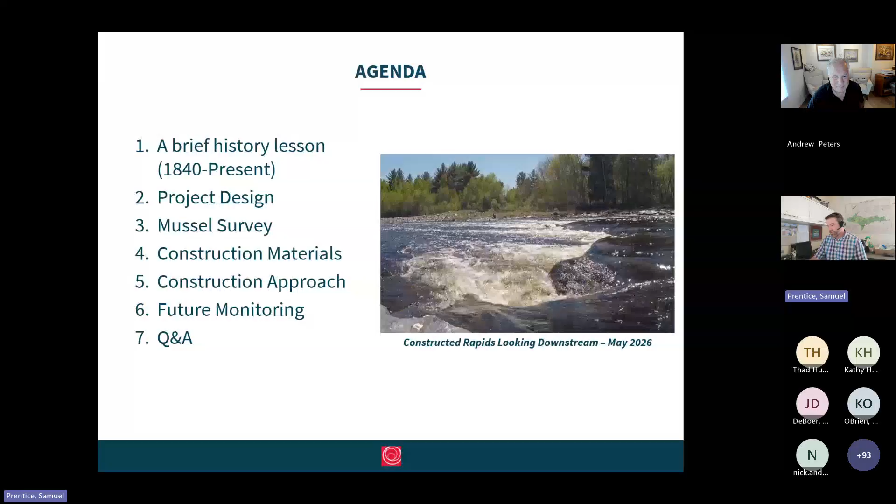So for folks that are not familiar with the state of Michigan and Michigan's Upper Peninsula, we're almost into Canada. We're on that south shore of Lake Superior, and this is just an older geologic map of the entire country.

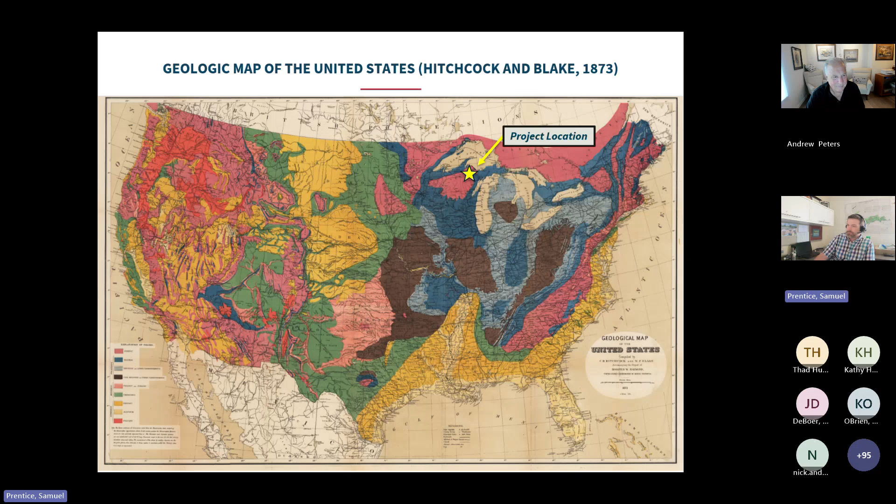Into Michigan's Upper Peninsula, the copper rush happened in the mid-1800s, 1840s. If you guys are familiar with the California gold rush, the copper rush itself was like ten times the amount of money made from that shorter gold rush in California.

And then this project, the Republic project, that was actually extraction of iron ore from the earth. So you have a lot of minerals that were pulled out of Michigan's Upper Peninsula, certainly into Wisconsin and the Minnesota Iron Range as well. But it's just a really cool part of this project, and it does actually have ties to the work we were doing more recently.

So you'll see the little note there called Republic District. That is the Republic Dam and the project site we'll be talking about today. There was a mine opened in that area in 1872, and then one of the dams we just removed in 2024 was actually original to that mine, built in 1876.

This is a little ortho mosaic just from Google Earth. So the original mine operated from 1872 through 1920. There was a pretty long hiatus here and at many of the other iron mines in the Upper Peninsula. The pelletization for making taconite, these marble-sized pieces of ore, was developed in the early to mid-1900s, and that was the reason for the reopening from the 1950s through 1982. The mine closed for good in 1982 and has not reopened.

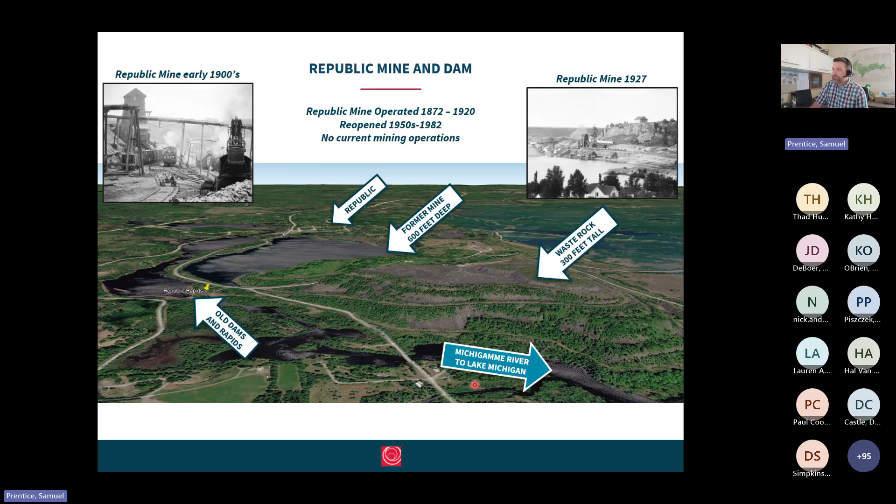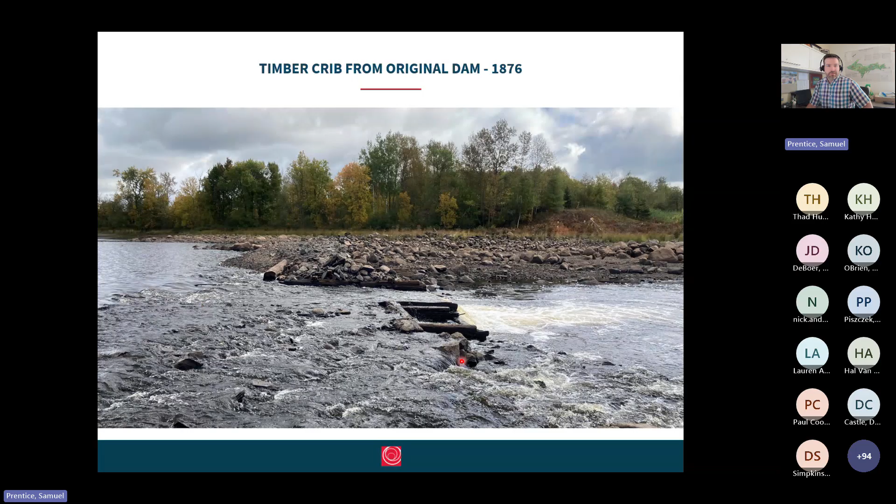So this is that timber crib I was talking about from 1876. That old open pit mine is behind the trees here. There's a former powerhouse intake canal we'll talk about later. But yeah, this was the original timber crib structure, built in 1876 and removed in 2024.

Some more recent history, 2010 to present: like I mentioned, Republic is trying to reinvest in the outdoor tourism industry, with a pretty low likelihood of the mine reopening.

GEI did a couple of different dam inspections. From those inspections, there were multiple repairs recommended on the dam itself. From that point, really into 2021, there was improper operation of those gates. They were raising and lowering the water very quickly, and that had impacts to the riparian wetlands, obviously to fish, mussels, and other organisms that could be stranded. So there was a lot of concern for the environmental health around the basin and for the river. That's really when we started to get involved.

We were trying to think of ideas for how to maintain some water level but also allow for fish passage. That was when I got involved, in 2018. And like Kathy said in my bio, for this project I did grant writing, data collection, design, construction oversight—kind of everything from beginning to end.

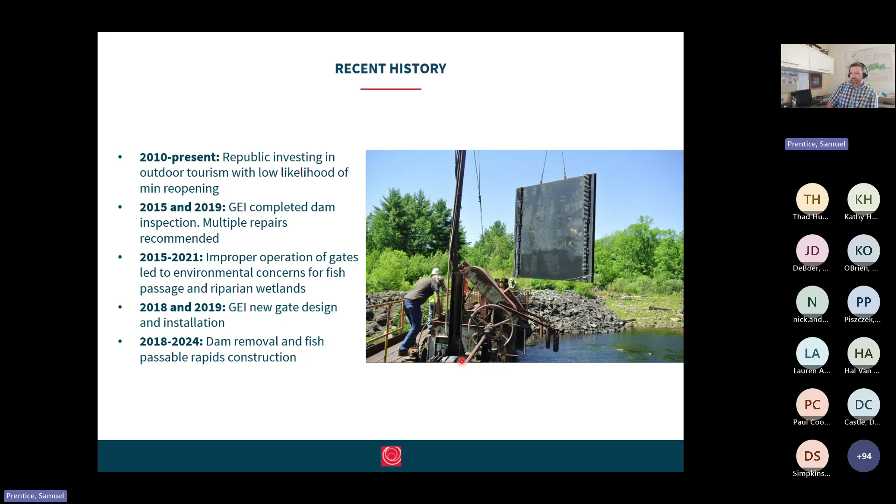Now that we're through the history, I want to talk a little bit about the design approach on the project. The goals we were given, working with the client, were to remove those two dams, build a passive structure that would maintain a water level they wanted within the river basin, and even support some of the infrastructure upstream.

There's a highway bridge crossing pretty far upstream where a lot of boats were bottoming out with the gates open on the old dam and lower water levels. So it wasn't really just to drive the economy; there were also some infrastructure concerns with having those lower water levels in the summer.

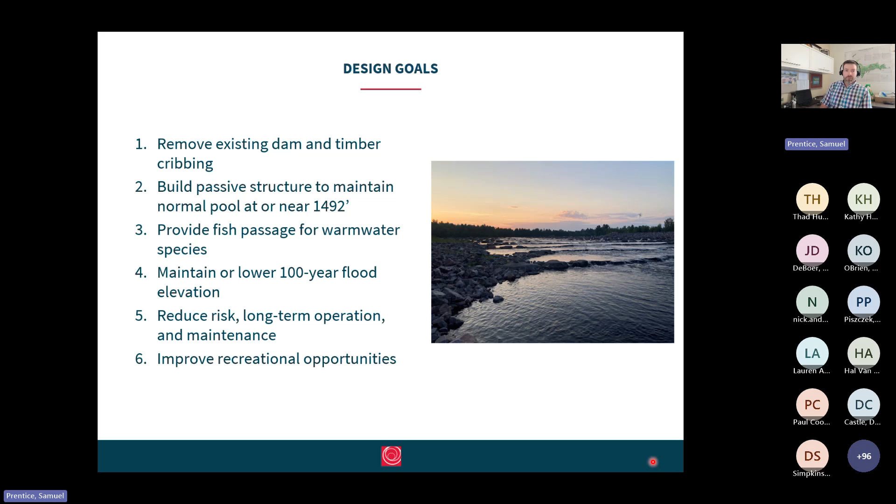Providing fish passage for warm water species, and I'll talk later about the differences between the swimming capabilities of warm and cold water species. Also, maintain or lower that 100-year flood elevation, reduce long-term risk and maintenance, and again, improve those recreational opportunities.

So the design we landed on was a rock rapids. We probably went through four or five different options over a couple of different years on what to build here. For those not familiar, a rock rapids is an alternative to full dam removal.

These boulder weirs are set up so that we're only dropping about 0.5 to 0.6 feet across each weir, stepping down this 15-foot head differential.

Another really important design aspect is these resting pools. Below each set of boulder weirs, we have at least one, and sometimes three, resting pools for fish to recover and then continue moving upstream.

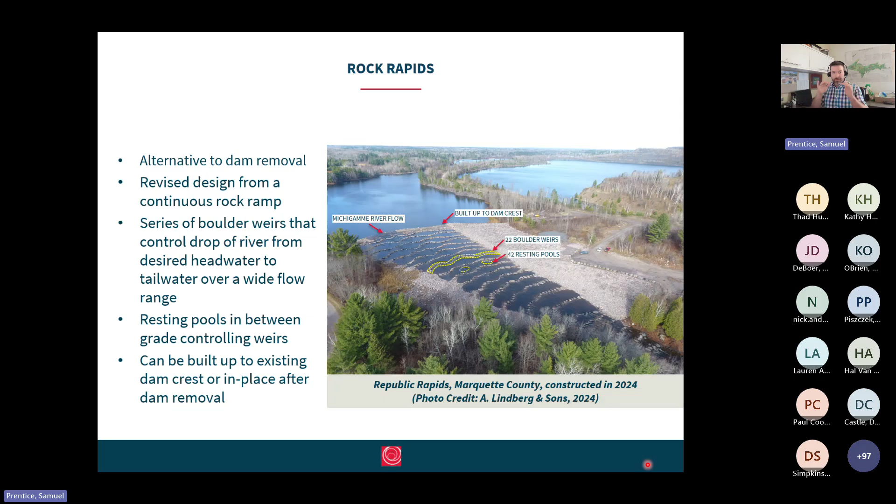I wanted to give Luther a shout out here. Dr. Luther Aadland, retired from the Minnesota DNR, was very involved in this design. He's shared decades of data and has built over 100 rock rapids.

On the slide here is his book from when he was with the Minnesota DNR, from 2010. A lot of these concepts I'm sharing were developed by Luther, and he has continued to revise that information and update the design criteria. I'd definitely recommend checking out his book to learn more about these structures.

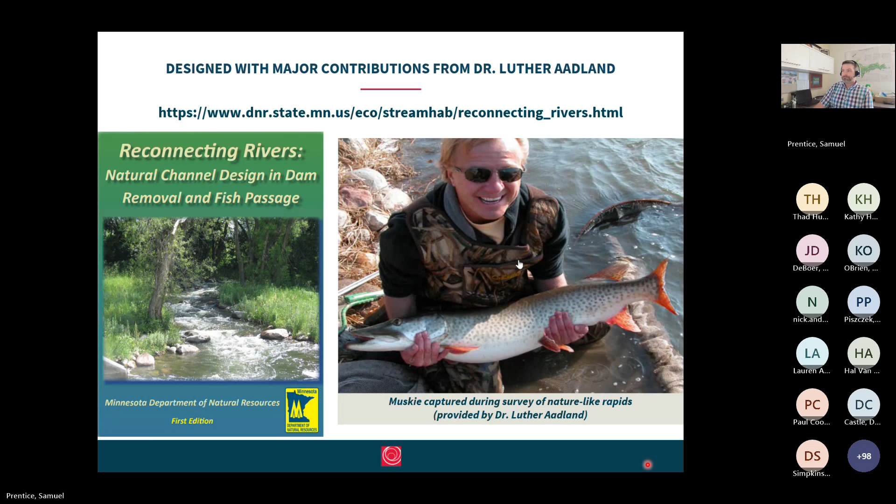The way these work: most warm water fish really don't have any jumping capabilities. These aren't the salmon in Alaska jumping over natural rapids. Warm water species need to be able to move through the water to traverse the rapids and move upstream, and in addition to not being able to jump, they're typically weaker swimmers than cold water species.

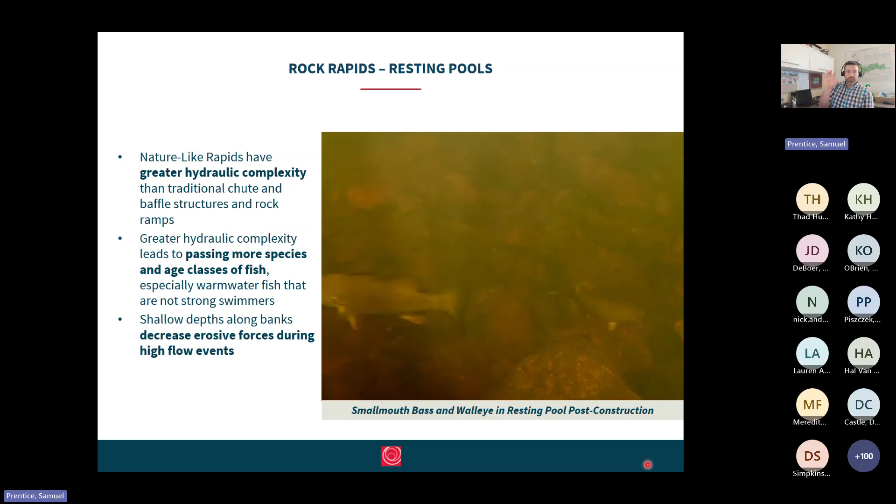One of the reasons I wanted to talk about the rock rapids versus the rock ramp is we're really trying to build up that hydraulic complexity with the rock rapids. So the difference between the gaps in the boulders, the difference in the boulders themselves, and how the hydraulics are interacting with that really does set up that diversity.

And then also in those resting pools, we're seeing different fish species. The velocities there are near zero, so it's a great spot for the fish to rest and regain their energy to then continue moving upstream.

Another piece of the design we had to think about was having a terraced cross section. So we have 3 levels here. If you looked at the cross section, we have a thalweg at the lowest elevation, a low terrace which is a 6-inch rise, and then a high terrace which is another 6-inch rise.

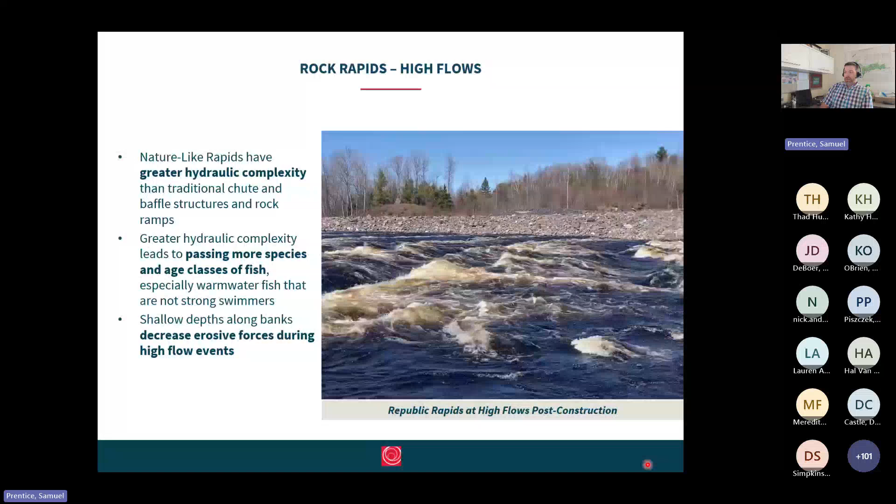That allows us, at higher flood flows like what's being shown in this video, to have very calm water along the edges of the banks to reduce those erosive forces, but we still have some pretty violent and turbulent water occupying the thalweg and the low terrace toward the middle of the channel.

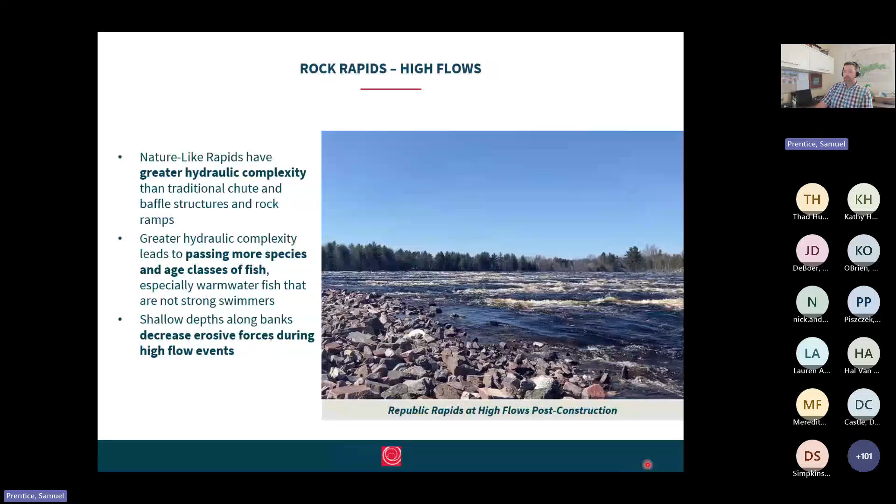So the design approach was to remove the dams that we talked about, add rock fill at the upstream end close to that 1492 target elevation, size the upstream weir crest so we were either meeting or lowering that 100-year flood elevation, spread the fall—the 10-foot fall from the dam plus another 3.7 feet of fall—over this entire structure to try to hit a 2% slope, and maximize fish passage by building in these sine wave weirs.

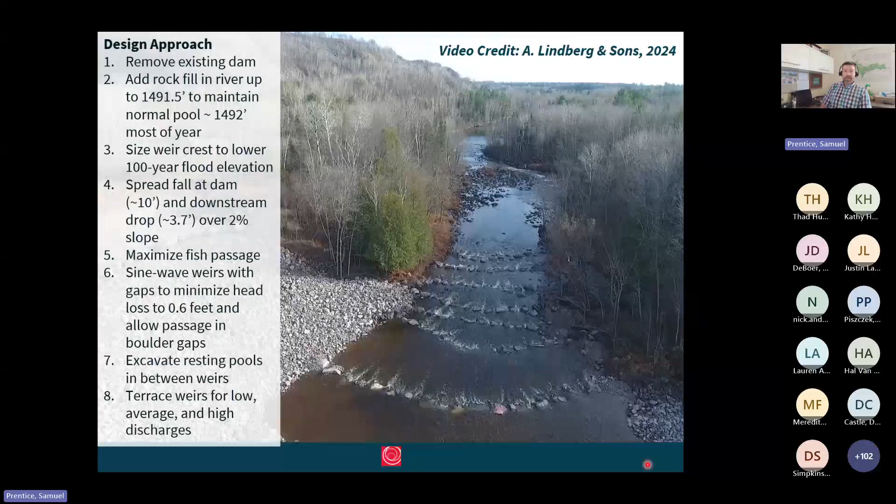When I say sine wave, we have this convex and concave form in plan view, and that helps to concentrate flows down into the resting pools to maybe move sediment out that's accumulated there. It also helps with the hydraulic cues and attraction flow for fish, so they're able to move through the wider gaps and know which way is upstream as they make their way through each row of sine wave weir boulders.

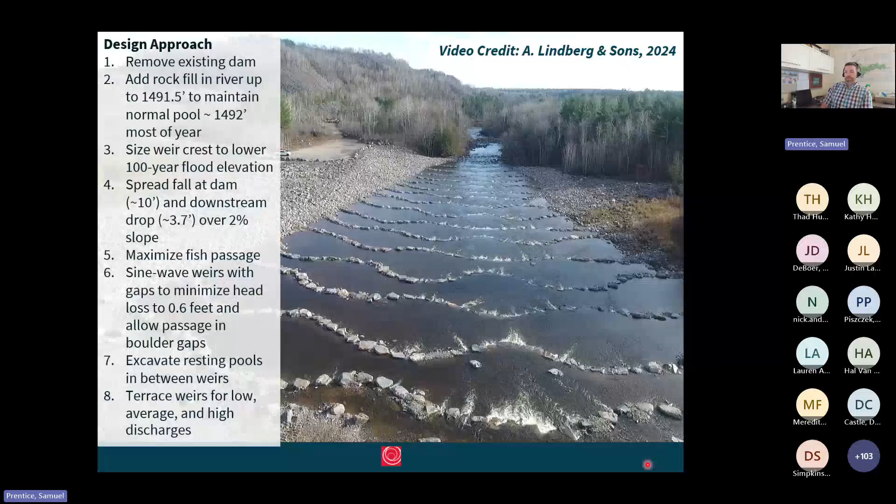Excavate the resting pools in between the weirs and then do the terraced cross section like I previously mentioned.

So the criteria for this—we did have Luther on our team, which was fantastic, but we also used some of the fish biologists we have on staff at GEI, and we collaborated very closely with the Michigan DNR local fish biologist. The DNR had done a study in 2018 in the basin, so we knew the species occupying the Michigamme River.

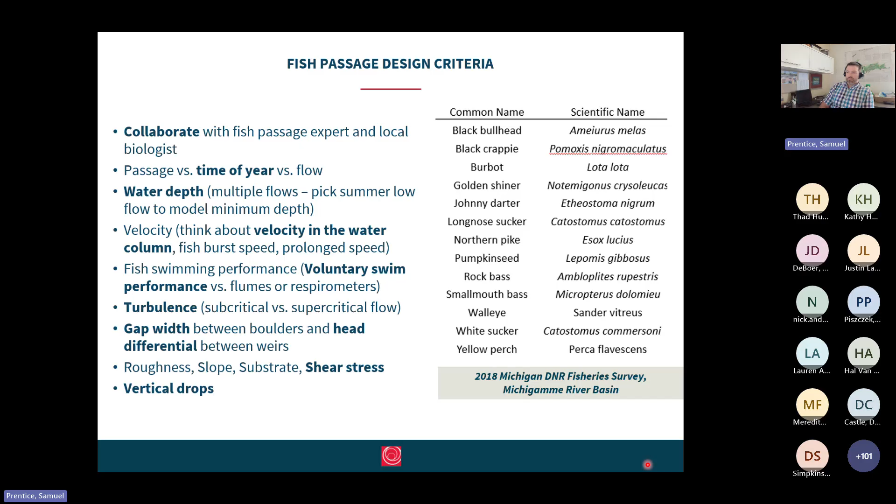From there, we were thinking about what depth of water those fish need, when they're trying to pass, what the discharge is, what time of year they're trying to move through, what the velocities are, whether they're moving voluntarily or being attracted to the rapids itself, the flow condition—whether it's sub or supercritical—the different gap widths to allow different sizes and species of fish through, the roughness, slope, shear, and the vertical drops across each of those boulder weirs.

Here's a simplified table of each of those design criteria we're looking at. For head loss per weir, I like to think of it for easy math as half a foot—0.6 is actually the design criteria used, related to velocity and longitudinal slope, keeping it at 2% or less, varying the gaps between 6 inches and 3 feet, and trying to maintain a depth within those gaps of 2 feet.

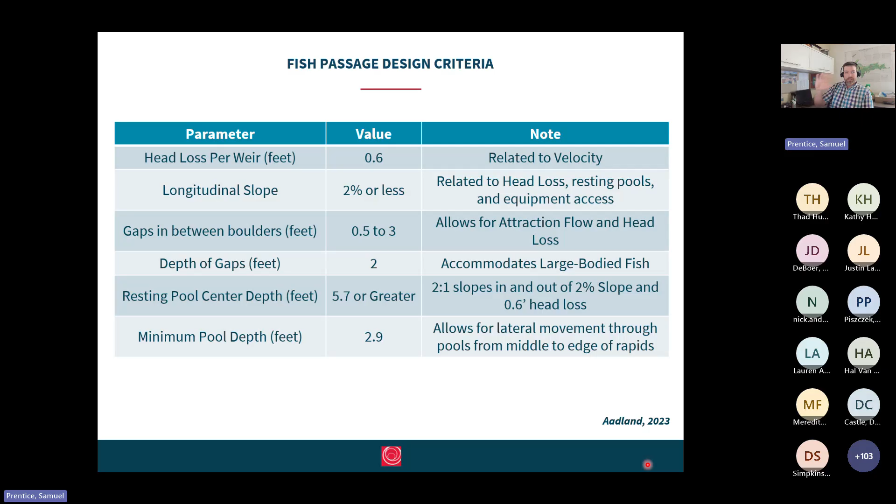The resting pools being at least 5.7 feet, but ideally greater than that. And then also these shallower pools in between those deep resting pools, making sure we have enough depth there so fish have the availability of moving laterally from the channel as they're trying to move more toward the edges during high flows.

For the head loss, the reason that 0.6 foot drop is so important is you'd need to do some math, but it basically relates back to velocity. If you look at the graph, that 0.6 is on the x-axis; running over to the velocity on the y-axis, we'd be looking at roughly a 6 foot per second velocity through the rapids. With that yellow line, if we increased that head loss, we'd just be going higher and higher with velocities.

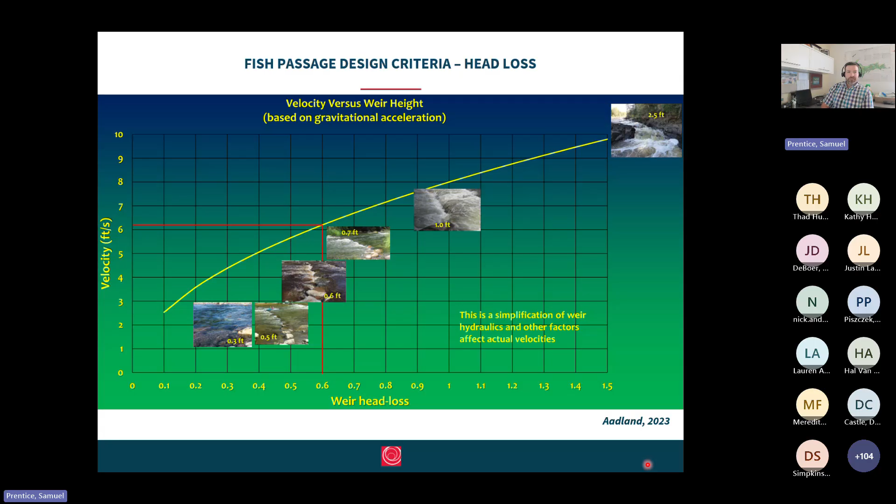With a lot of the work Luther has done and the data he's collected on fish passage, he's adjusted that head loss number lower and higher. As he's collected more data and assessed the success, he's settled on this half a foot, 0.6 foot number that we use for the Republic design.

So again, with some of Luther's work, he started out using a steeper slope, a 5% slope, built a bunch of these, studied the fish communities and passage capabilities, and then reduced that slope down closer to 2% for the ideal way of maximizing fish species and age classes for the warm water communities.

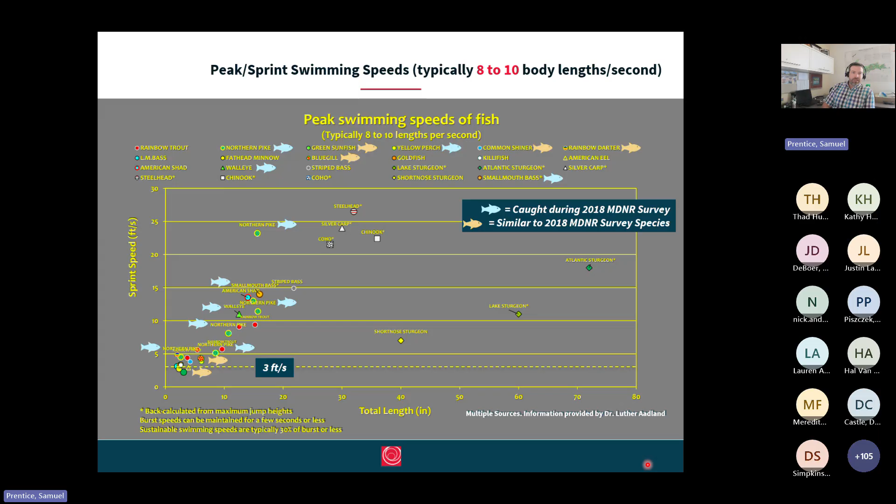Here's some more of his data. I think the key takeaway here is we have a bunch of different species, some of which were caught during that 2018 DNR survey. Others were used as surrogates, similar species. This graphic shows those different species and their peak or sprint swimming capabilities, which is what we're trying to use when they're shooting through those gaps in the boulders. A roundabout way of thinking about this is that's typically 8 to 10 body lengths of the fish per second.

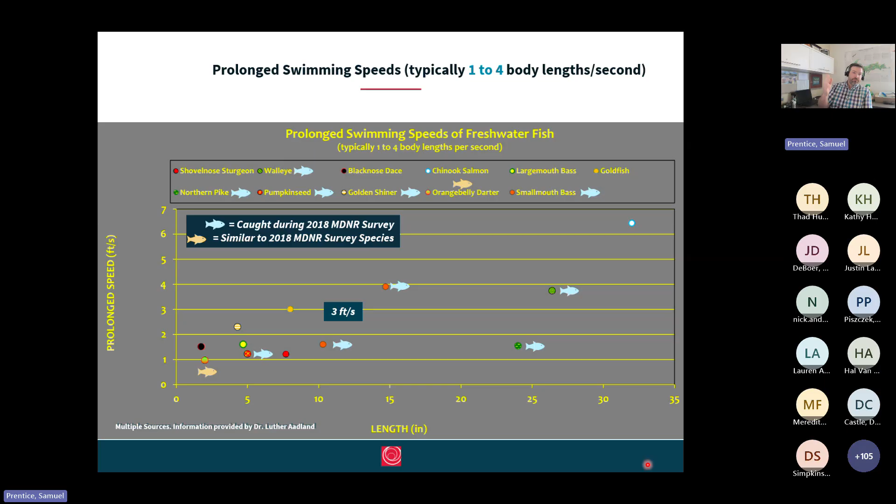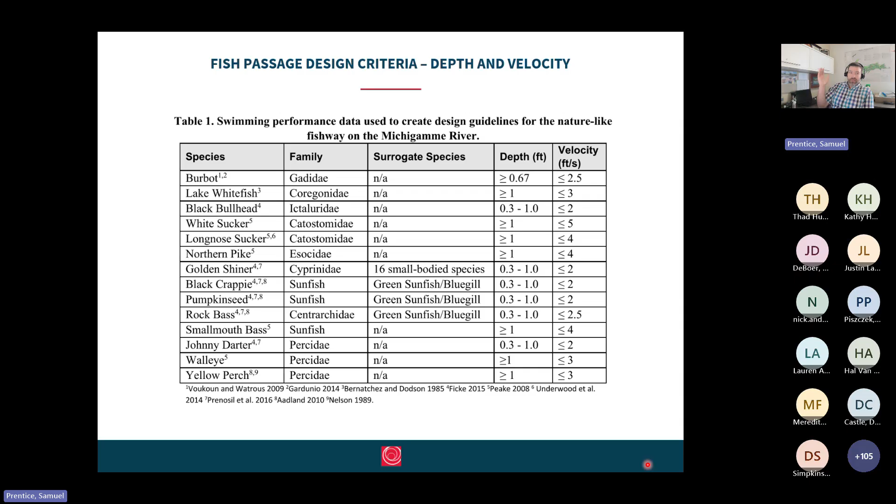Moving into a second graph, this would now be the prolonged swimming speeds, and these are much less. If you're thinking about a fish trying to make its way through a culvert, or if there's no refuge or resting pools, that would be closer to 1 to 4 body lengths per second. So we took this data from Luther, we did some of our own work, and started building out this list of all the different species in the Michigamme River, using surrogate species if we didn't have data for those.

Then we came up with depth limitations and velocity limitations. We also used work from others - this is a Castro Santos paper that some may be familiar with, looking at the fatigue time for fish. It's in body lengths per second, but they're also measuring how quickly those fish fatigue. So in this example, if you had a 6-inch walleye with a sprint speed of 15 body lengths per second, that would translate to 7.5 feet per second for their swimming performance for 2 seconds.

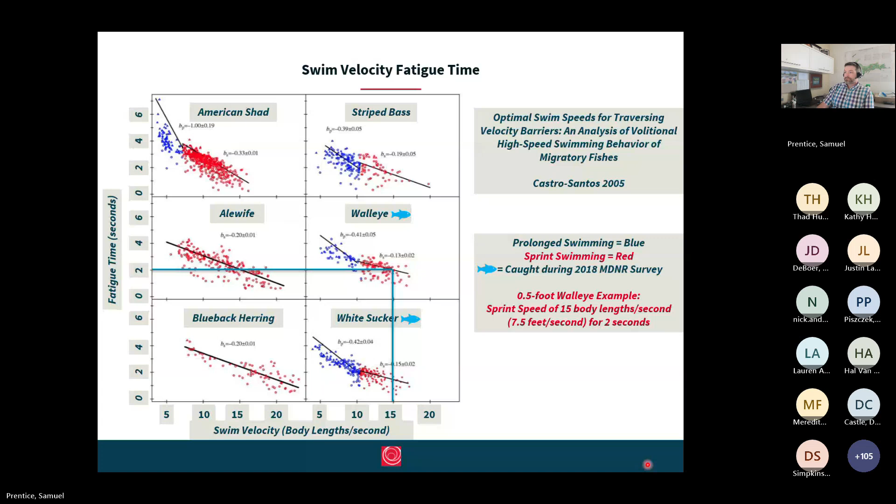If we apply this to the river, they would be able to swim at that velocity, 7.5 feet per second, for 2 seconds. But we haven't accounted for the forces of the river itself, so you have to do some subtraction. In this example, I assumed the river was moving at 3 feet per second, so the ground speed of that fish is really only 4.5 feet per second. You can think of it as this treadmill phenomenon, or infinity pool - they can't actually swim forward at the 7.5 feet per second, it's the net of the two. They only have a couple seconds to do that, so you'd have to turn it into a distance. In this case, they would be able to travel 9 feet before becoming exhausted.

An additional complexity is just how close are they to the bottom of the river itself? Typically that's where the roughness elements and friction is greatest, meaning the velocity would be lowest. So the fish are innately using this to their advantage - they're hiding behind rocks, right at the bottom of the river. The takeaway is that adult fish, because of their size, especially larger species, are going to have their noses further off the bottom where velocities would be higher, compared to a young-of-year fish or minnow, a smaller species, which is able to get right down to the bottom of the river.

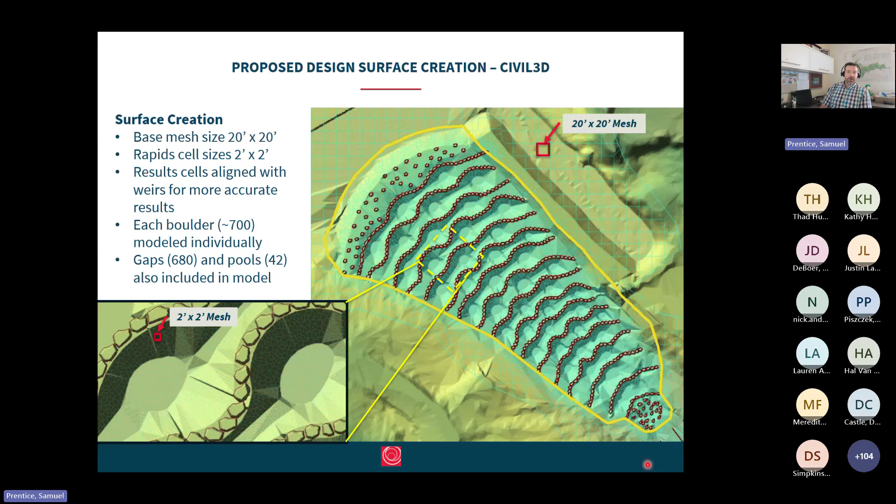So we took all of that fish data. We did build a pretty complex rapids surface in Civil 3D and modeled each of the boulders and each gap, and then brought that into HEC-RAS 2D. The mesh size we used for the HEC-RAS model was much larger outside of the rapids just to save on runtime and file size. Down in the rapids itself, we used a much finer mesh size, a 2x2 mesh. We also aligned those break lines with the sine waves built into the model so we could better understand the modeling results.

We looked at different design criteria: velocities, depth, sub-supercritical flow using the Froude number. We did that at 4 different flows. The ones we were most interested in for fish passage were a summer low flow, an average daily flow, and that bank full flow. The 100-year flow was just looked at to make sure we weren't increasing that from what was there when the dam was in place.

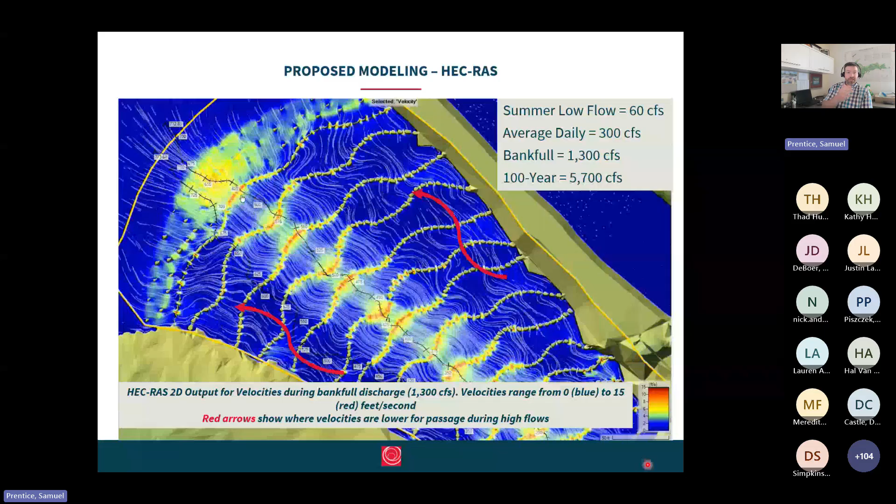What's nice with this two-dimensional model is you can see when the velocities are high, the fish may actually want to move laterally. That's what this second slide is showing - if you have a lot of hot red colors in the middle, maybe the velocities are too high. We do have these resting pools and shallower pools connecting to those laterally, so the fish can hug the banks as they would naturally in the river.

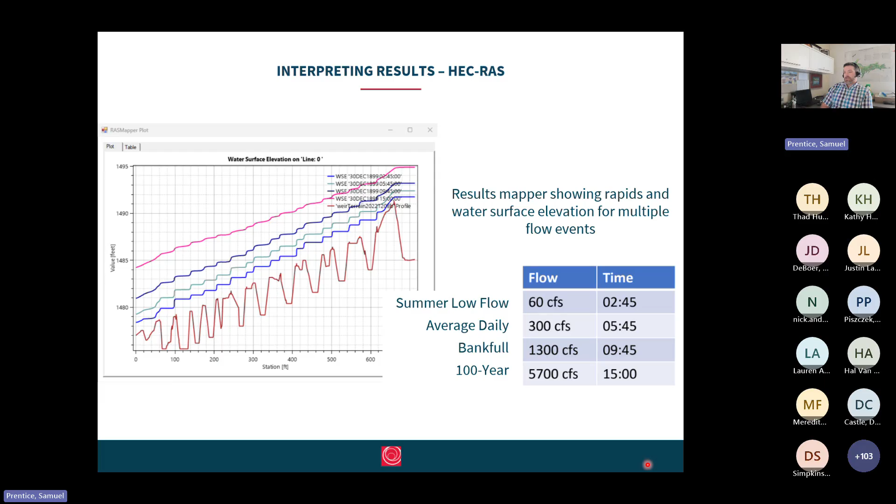This is just a profile cut along the Thalweg, but you can see the geometry of the rapids in the maroon on the bottom, our 4 different flows. We also ran one flow file with different time steps, or different times that those flows would kick in, to see what the depth was and to also look for that 0.6 head loss.

So some of the limitations with modeling - you have to put good data in, and you also have to have an understanding of what results you're looking for. That's why it's critical to be working with a team that understands fish behavior and their ability to pass, and what their swimming capabilities are.

As most of us know as engineers, Civil 3D is great for roads and other traditional civil projects, but not so great on river and complex rapid surfaces. Just knowing that going in, it's going to take some time to massage those tools to get the surface we want for doing the hydraulic modeling.

We did go ahead and choose to use a two-dimensional model for this. We did that knowing Luther had a lot of really good data - he knew how to interpret the model and help us on that end. You certainly could run a 3D model for this; you would also still need to understand what those results mean and if fish are able to move through the system. But that third dimension for this two-dimensional model is actually depth averaged.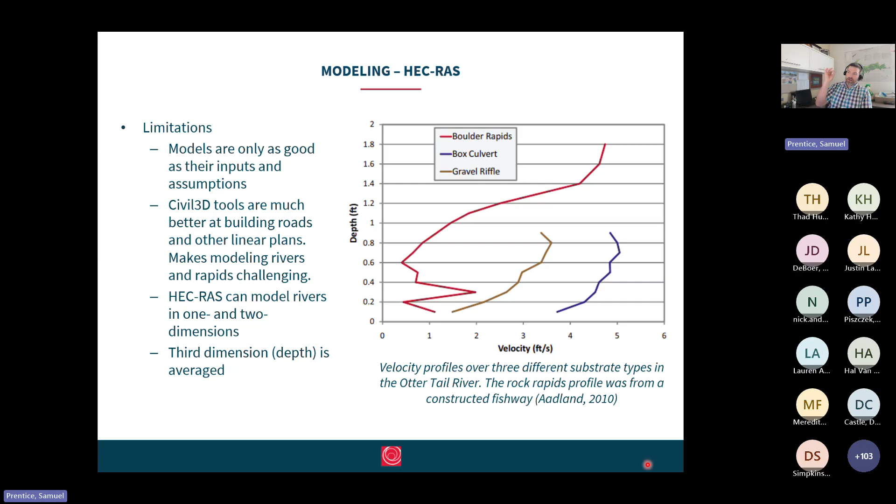This is a little chart from Luther's book just showing how those velocities change with depth as you go from no depth, in this case, all the way up to a 1.8 foot depth. And that would be for boulder rapids, a box culvert, and then a natural gravel riffle.

I think I'm getting a little low on time, so I'm going to rip through the mussels to try to get down to some of the construction approach.

So good during the permitting phase - permitting took a couple of years on this project because it was the first design done in this manner in Michigan. So it was very new to both the DNR staff and the EGLE staff that were reviewing the application.

Total survey time was 77 hours. We found nearly 2,000 live mussels. 92% of them were found in these corners right by the old dam. For those of you that aren't as familiar with this, these are native freshwater mussels, and the objective here was to survey, find, and relocate them outside of the construction footprint.

So these, in this case, are all giant floaters. They're about fist sized, and they embed themselves down into the sediment. This white part right here is actually the live mussel inside the shell that's opening and siphoning and filtering the water.

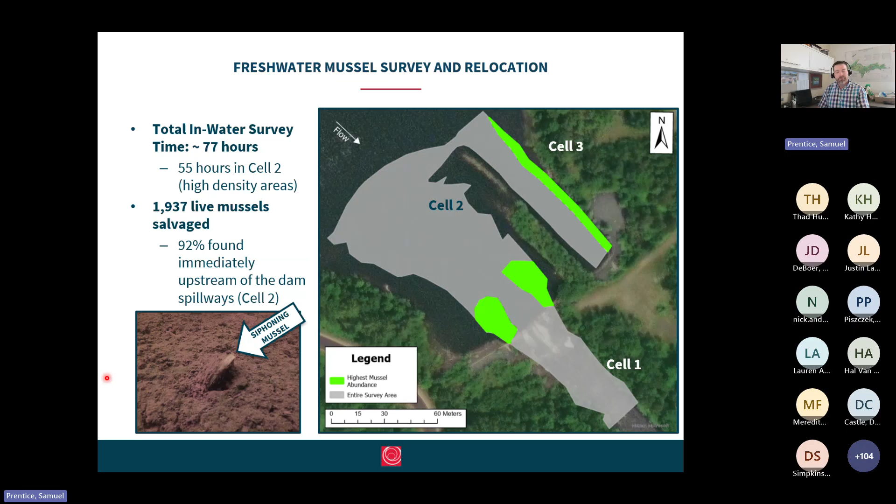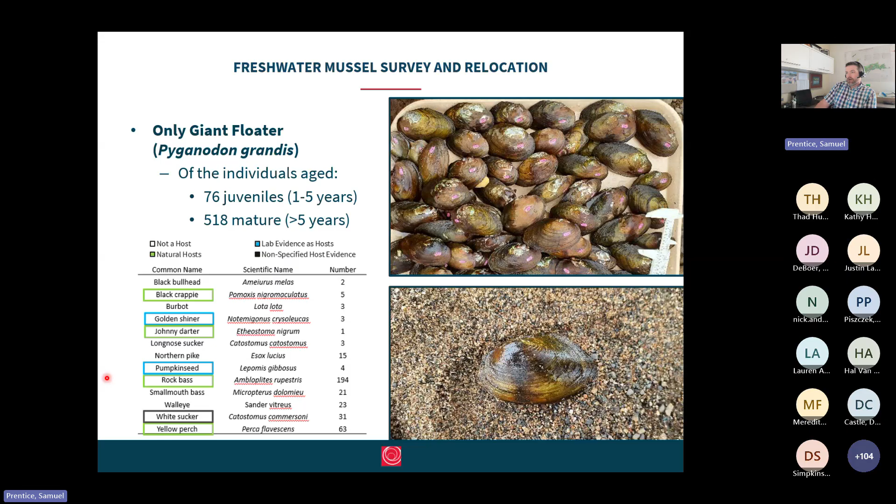And then this is kind of an interesting slide. We only found giant floaters. The natural hosts for those, many of those were off of that list from the DNR for the fish that were surveyed in 2018. And then there's some lab evidence of different hosts for giant floaters, and then some non-specified host evidence with white sucker.

So mussels were cleared out. We were able to move into construction. I'm going to talk about the materials here quickly and then move into the actual construction approach.

So we had the old mine there, right? Talking about the history, this hill slope in the back is that 300-foot rock pile I was talking about. And so the contractor was able to process a lot of the material for this project right on site.

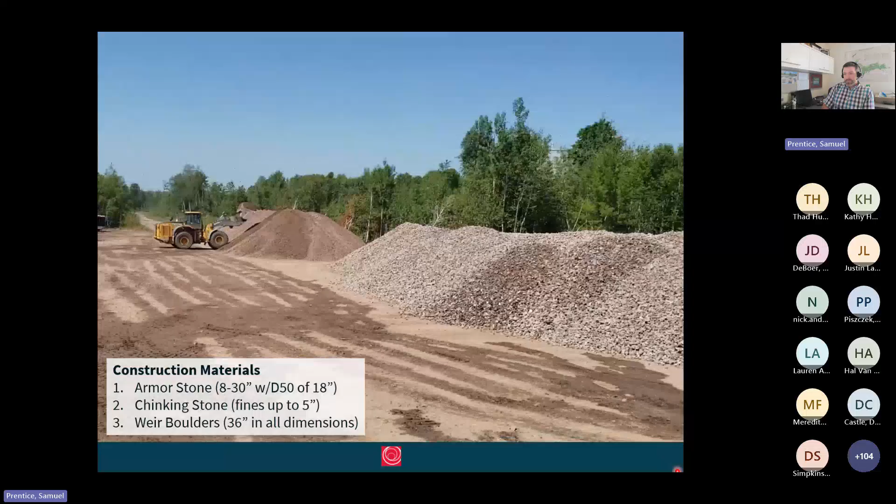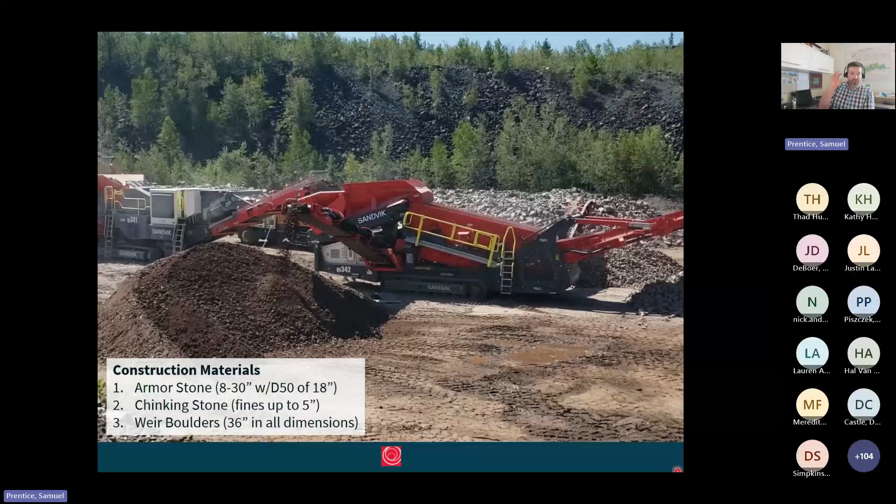So we had three materials we were using. I'll refer to one as armor stone - that's this much larger 8 to 30-inch material with a D50 of 18 inches. Chinking stone should chink the gaps and fill the voids in the armor stone, so that was fines up to a 5-inch material. And then finally the weir boulder - those were 36 inches in all dimensions.

So the armor stone forms the base of the rapids. For folks that are familiar with rock sizing, we were using some traditional critical shear stress Army Corps calcs to get a D50 from that. If there were areas of the bed that were prone to scour, we were then using the rock thickness to be twice that calculated D50. Fortunately, the Michigamme River does have a lot of very large rock on the bottom of the channel, so we really didn't have to line the pools with that twice D50 thickness. But if you were working in a sand bed system, that would be a critical component of the design approach.

That rock was sourced from the mine stockpile, like I'd already mentioned. And then we went through an interesting process to confirm that D50 by weight instead of by count. So for that process, we had a loader bucket - or the contractor had a loader bucket - that had a scale on it. They would move a sample over and take measurements on what that sample weight was in tons. And so that's what the readout from the loader is showing right here.

We would walk through the pile with them and mark off anything that was smaller than that 18-inch D50. Those smaller pieces of rock would then go back in the loader bucket, and that weight would be collected in tons. Then, because we took the stuff that was smaller than 18 inches, if that weight was less than half of the total sample weight, we would know that we met our D50 and the sample would pass.

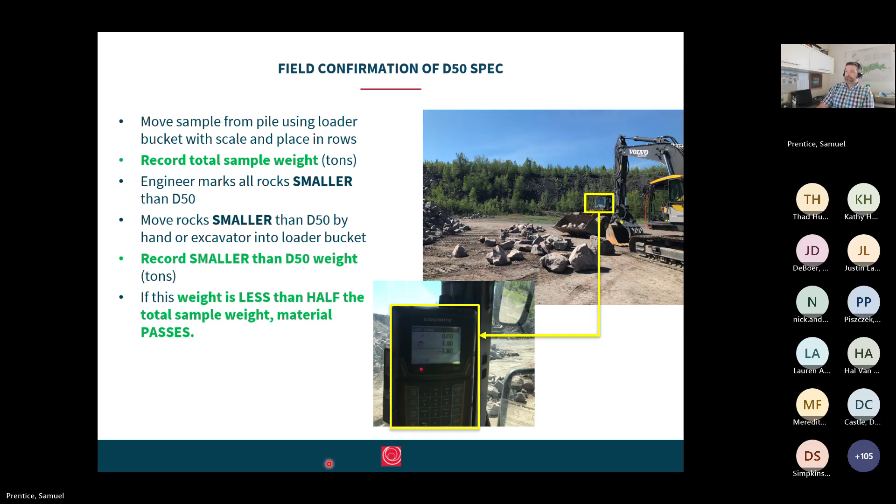So the chinking stone, the fines up to 5-inch, that was layered in lifts with the armor stone to build out the base. It was also placed on the upstream side of the weirs to minimize seepage through the structure, and it also formed the top dressing at the crest of the structure. We did give a spec for this, and we did get close, but as you can see with the rainbow colors here on the gradation report, this was absolutely an iterative process. The contractor was well aware of that, and this was very much a performance spec, basically saying that we needed to make sure seepage was minimized through the structure, and they would need to generate multiple mixes to get the recipe correct.

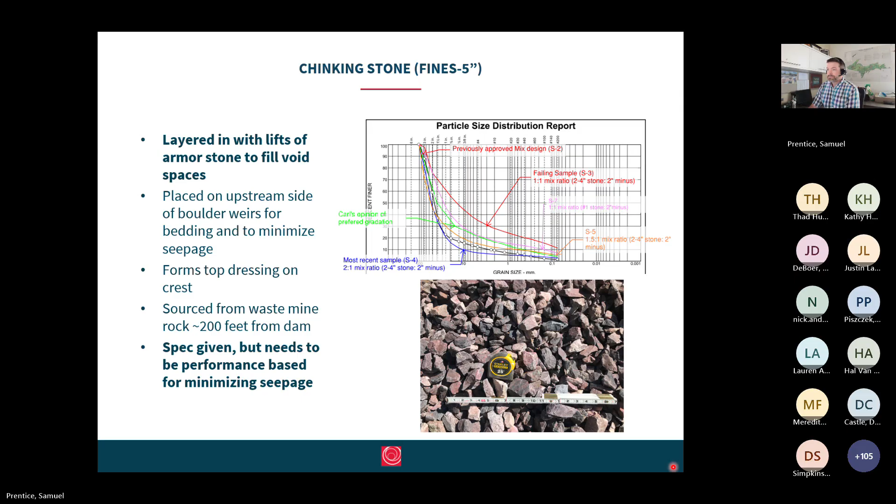And then finally, the weir boulders - those will get embedded halfway into that armor and chinking stone mix. This is where the fish are swimming through, so they're swimming through the gaps in the boulders.

This is the way that you control that critical measurement of head loss, by adding in those boulders and then adjusting the gaps. Minimum density for our spec was 165.

If we remember back to the history lesson, this whole area had very high iron content. These waste rocks still have iron in them, it just at the time was not profitable to break them and process the iron. So the rock here had a much greater density than our spec.

It was 270 pounds per cubic foot in some instances. And then in the field, what we were doing was measuring those dimensions. If we were 36 inches in all dimensions, we'd mark it with a dot. If it failed, we would mark that with an X.

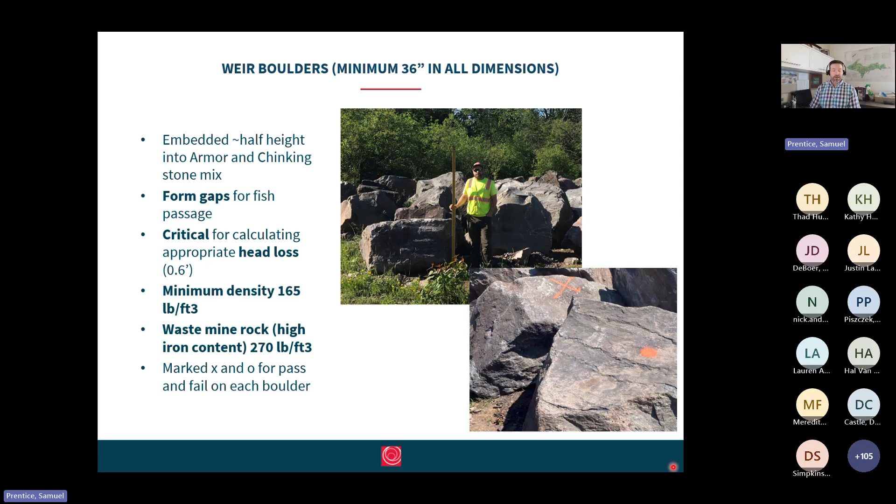So moving into the construction approach. This was a local contractor. Most of their work is producing aggregate and other materials. They do some earthwork as well, but they had no previous experience building one of these rapids.

They owned that old mine property and the stockpile of material that we've talked about. They were able to complete the work in one season, starting in May and ending in November of 2024. Their fee was right around $2 million to do that work.

This was supported through grant funding from the DNR Fisheries Habitat Grant, the State of Michigan's Dam Risk Reduction Grant, and then for local matching funds, Republic, our client, did have a local millage passed to support the grant funding.

In this top picture here, you're basically seeing their construction crew. They had a foreman, an operator, a couple people that ran loaders, and a truck driver. So it was a pretty small crew.

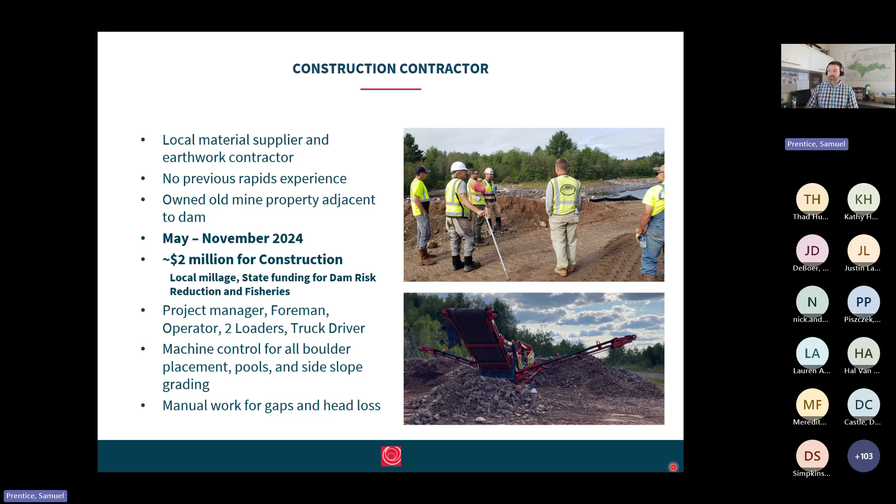They did have GPS machine control for placing all the boulders, digging out all the pools, and some of the side slope tie-ins. And then they were manually going through and measuring the gaps, and also that head loss across each of the rows of boulders. So the construction sequence: they removed both of the dams, processed the material, built the crest at the upstream end.

They layered in that chinking stone to minimize the seepage, and then they basically worked from upstream to downstream in rows of 3 for those boulder weirs.

And then as they got downstream of the former dam and they were going further and further down, they did need to tie in to the side slope where those vertical abutments were for the old dam walls. So they began cutting that east bank, adjusting the weirs to meet that 0.6 head loss requirement.

This intake canal was also filled. That was more of a, I guess on this project, maybe a geotechnical seepage concern.

The rapids itself is great at handling water that's coming downstream, not so great at handling lateral flows. And so there was a concern that this berm would overtop at higher flows, hit the boulders laterally, and that could lead to a potential failure.

So the decision was made to fill this intake canal, raise that above the 200-year water surface. And so that way the water up to the 200-year would be passing down the rapids instead of across it.

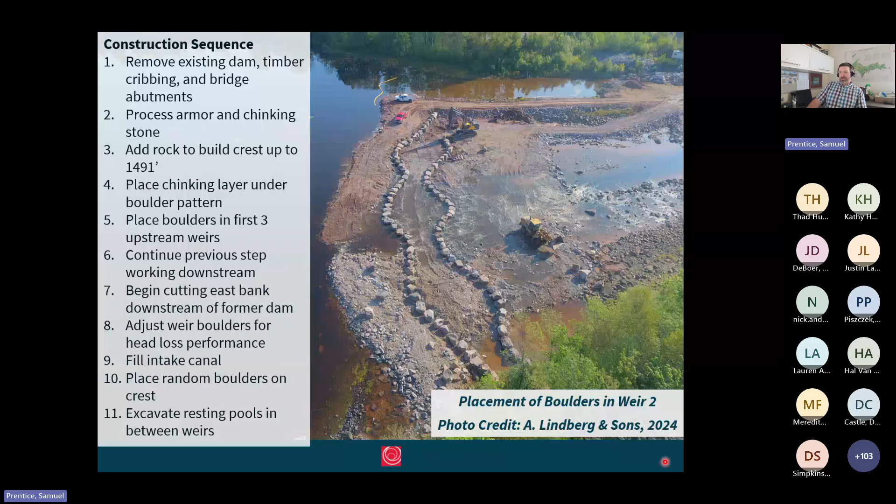And then the last step, because once the pools are dug, the contractor can't get back in, was to excavate those resting pools in between the weirs and back out of the construction site.

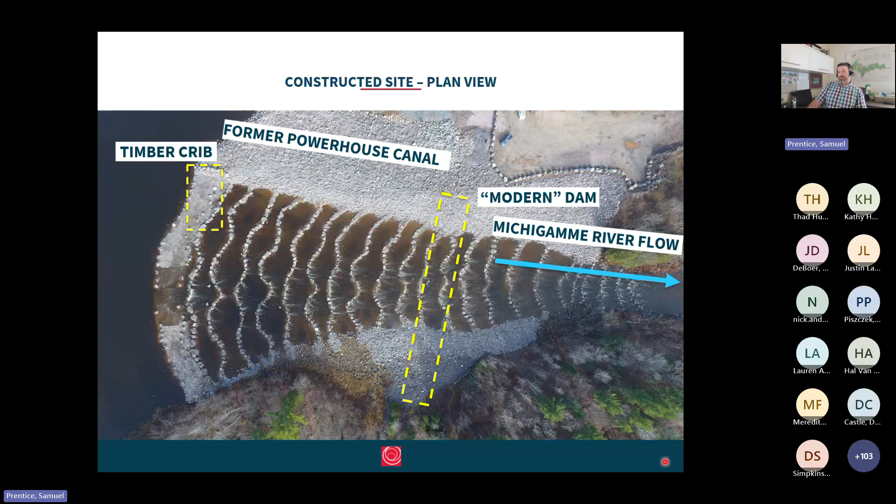So here's an overlay of the 2 dams that were removed, and then same overlay with where that timber crib and the more modern dam were in relation to the completed rapids.

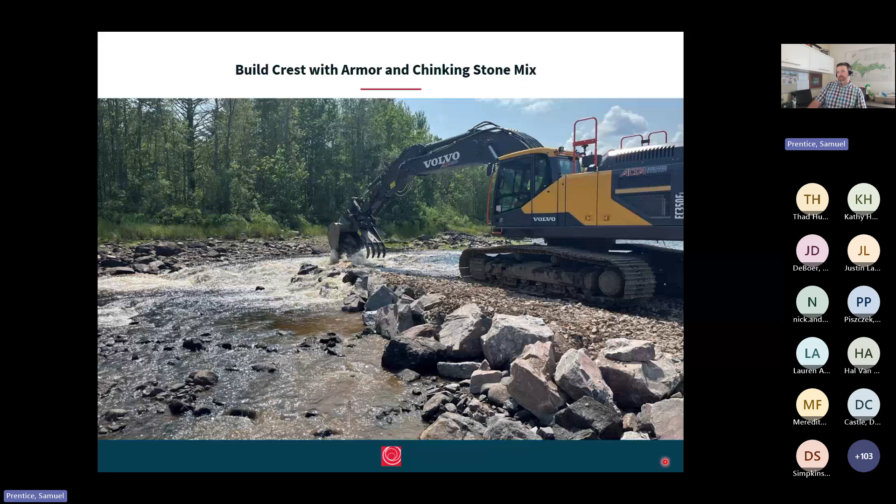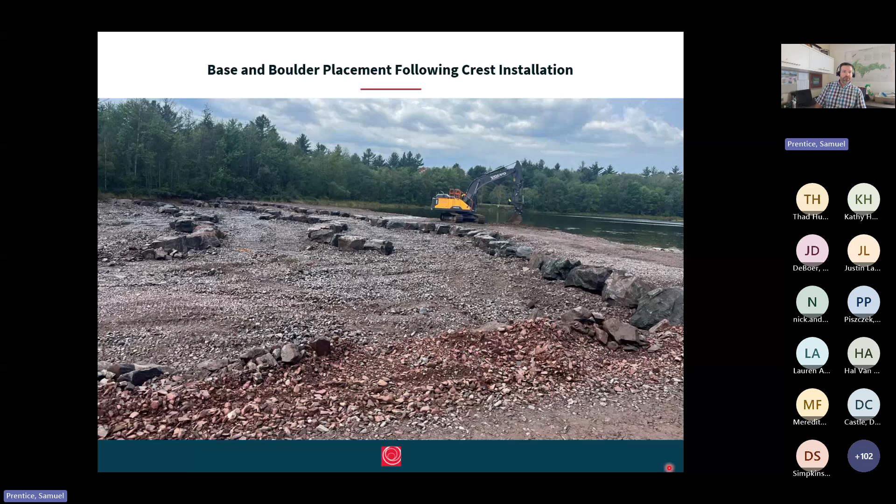This is a photo showing the building of the crest with that armor and chinking stone mix. This is the contractor building up the crest, but they've already built out the first 3 rows of boulders. They did leave this area open for equipment access, and so we weren't measuring or accepting anything on those sets of boulder weirs until they completed those and no longer needed to access from that corner.

Walking through the steps here: the contractor would build up that base made up of armor and chinking stone mix. That last little bit would be just that finer chinking stone to be able to push those boulders in to the constructed height. The boulders would be seated into that chinking material.

We did have a lot of tabletop boulders here that had flat surfaces, but there were some irregular ones that we put in as well. And so we just had to work with the contractor and make sure that we were getting very close to that design elevation with the boulder top.

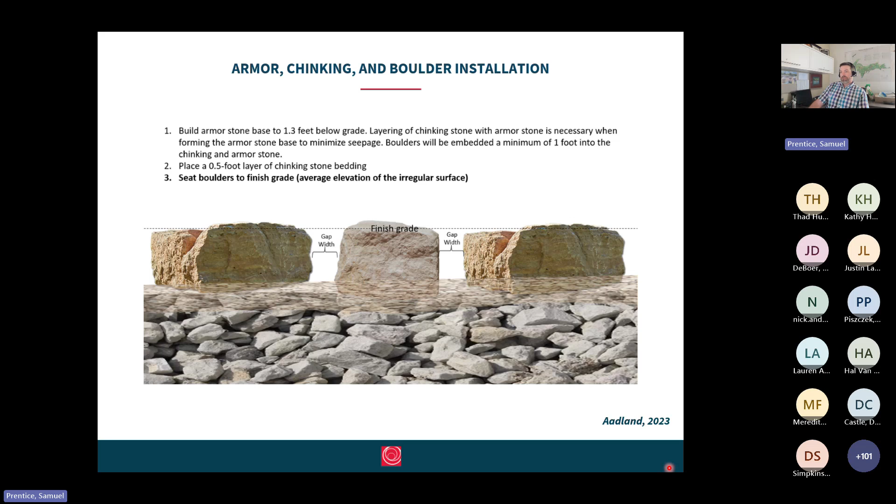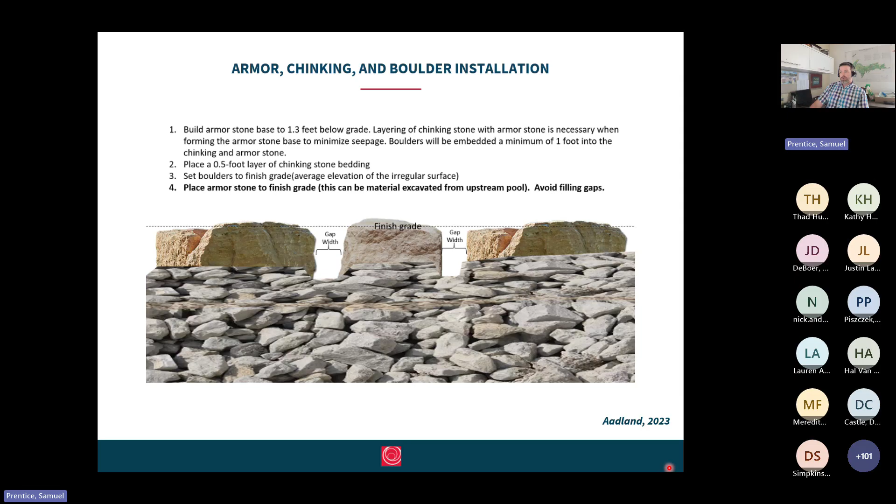After those boulders are placed and we approve the elevation of the boulders, the contractor was then going in and placing that larger armor stone up against the boulder itself, and then backfilling with chinking to wash that in again to minimize seepage and potential scour right around the boulders.

And so we were able to approve the elevation of the boulders, but we didn't actually sign off on the structure itself until we were able to measure that 0.6 foot head loss once the water went through and the hydraulics were established.

To allow for that to happen, we provided this to the contractor to show the ideal way of placing the boulders in that top row. If those are placed on an angle, they can grab the boulder and move it back and forth a little to make sure the head loss requirement is being met.

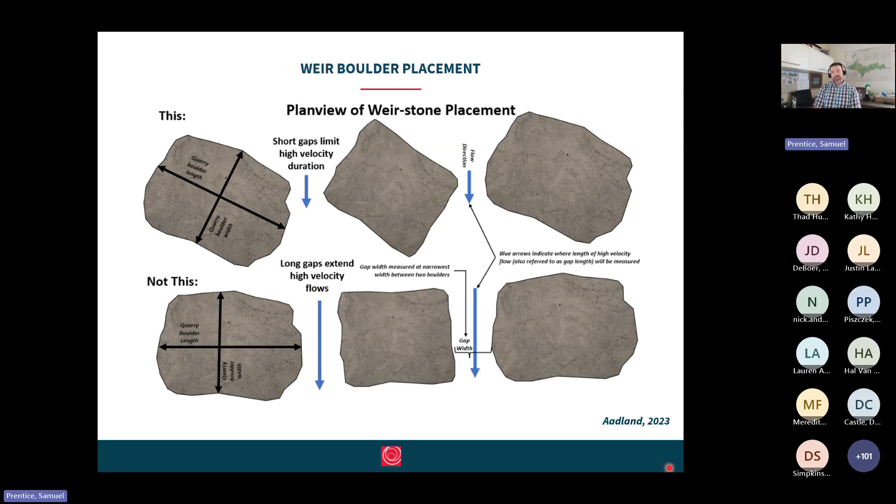That also helps for fish passage. If the fish are trying to move through just a shorter gap, the hydraulics won't really matter for that 0.6 head loss, but it's a shorter path for the fish. Whereas with this bottom row, you could meet the 0.6 head loss requirement, but that's a much longer parallel flow path the fish would have to move through. So there's a potential for minimized fish passage success with boulders placed parallel to flow.

So they worked from the upstream end to the downstream. This is something I hadn't really thought about when drawing things on the computer, but one of the other reasons for that 2% slope across the entire structure is to leave enough room for equipment between each row of boulders, and the ability to go in and build the resting pools. So that's one reason not to increase the slope - there were certain weirs being built where it was very tight for the contractor to get their equipment in.

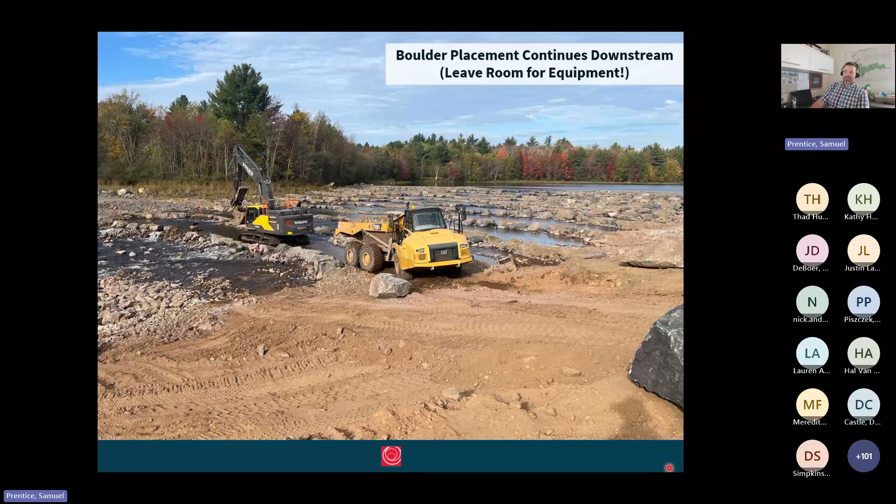So like I mentioned, they had machine control and GPS for confirming the elevation heights. We would typically walk behind them, look at their screen, look at the cut fill, and if we were within 1/10 of a foot, we would approve that boulder placement and move on to the next one.

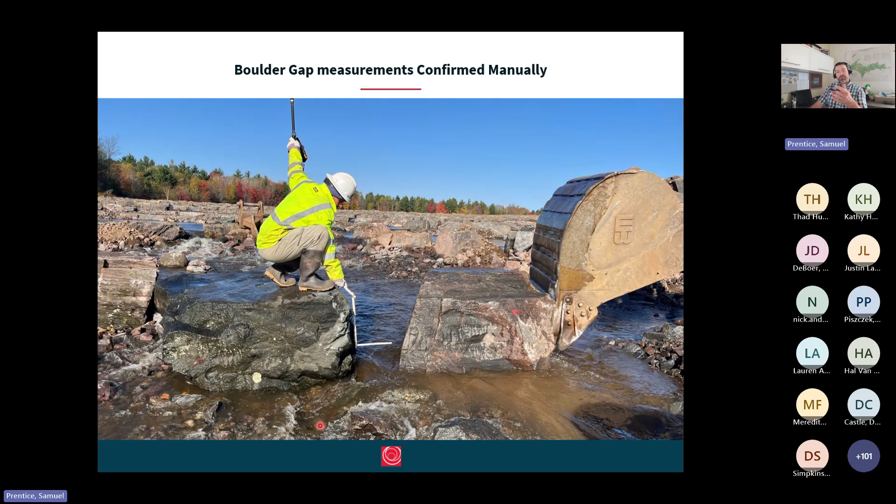And then after those boulders were placed, they were manually measuring those gaps. Once the water was flowing fully through the rapids, that was when we would go through and look at this head loss requirement.

So this is a profile showing a set of 6 different boulder weirs. This 0.6 target is what we're going for. In this example, there's too much head loss on the second boulder, but there's inadequate head loss - not enough - on boulder 3.

So in this case, what the contractor could do is close up the gaps at 3 to get the ideal 0.6 foot head loss we were looking for. That would also help back the water up to this excessive head loss here.

In the lower example, we have a different issue. This would be inadequate head loss at weir 1, and then at weir 2, we have excessive head loss.

In this case, you could open up the gaps at weir 2, which would let more water through, dropping this upper water surface closer to the 0.6. Then you could start filling in some of the gaps or adjusting the boulder slightly to get the ideal head loss at boulder 2.

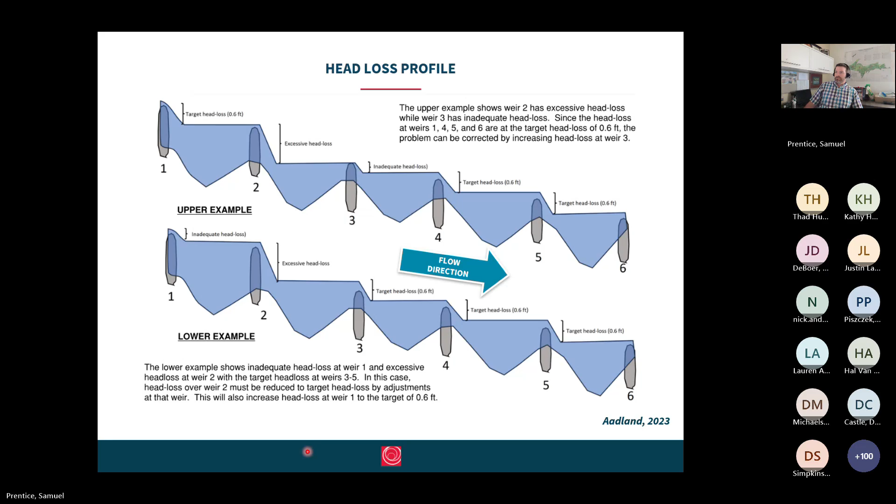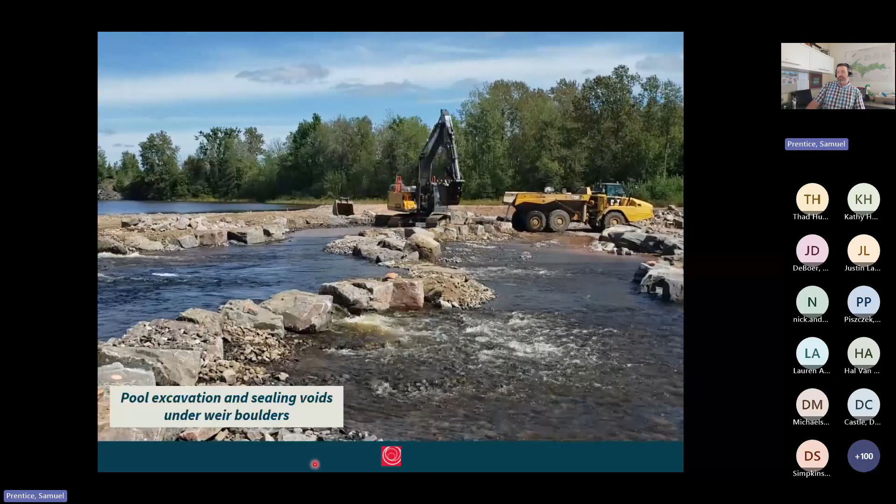So here are some photos of how the pools were constructed and how the voids were sealed under each of the weir boulders. This is what the constructed site profile looks like. I just highlighted one row of boulders and one row of resting pools, but that continues throughout the entire structure. Here's the normal pool elevation the client was asking for.

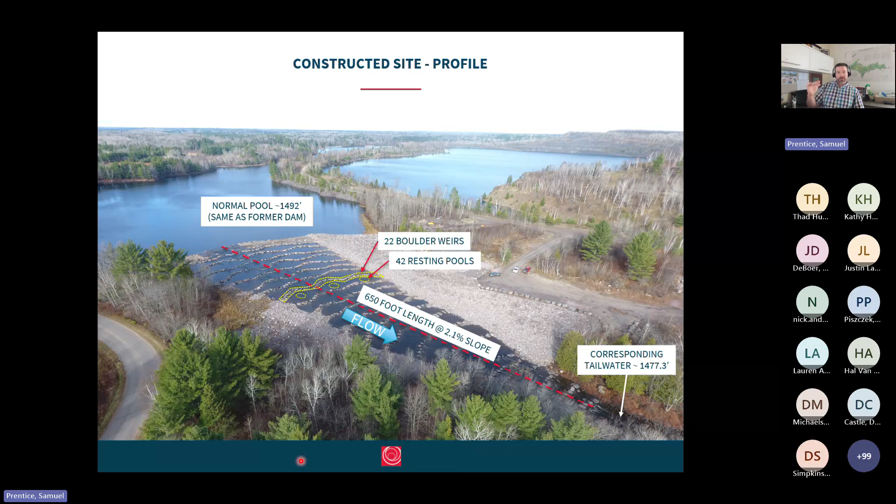This is a 650-foot length at just over a 2% slope. Toward the bottom end, we wanted to make sure we had the 0.6 head loss, so we had to add in a few weirs right at the bottom to make sure we didn't have a waterfall right at the end.

So some of the challenges: very unconventional construction, unique materials. We did have very low flows during construction, so that was tricky to deal with - that subsurface flow, working in the river while making sure we didn't cause any turbidity issues, the head loss criteria, boulder placement.

We did also have this hydraulic funnel happening, so the weir crest was 300 feet wide, but the natural river width at the bottom end was 80 feet. So we had to make sure we were stepping down appropriately for that narrowing of the channel, and chasing that lower river slope - that was a challenge for sure.

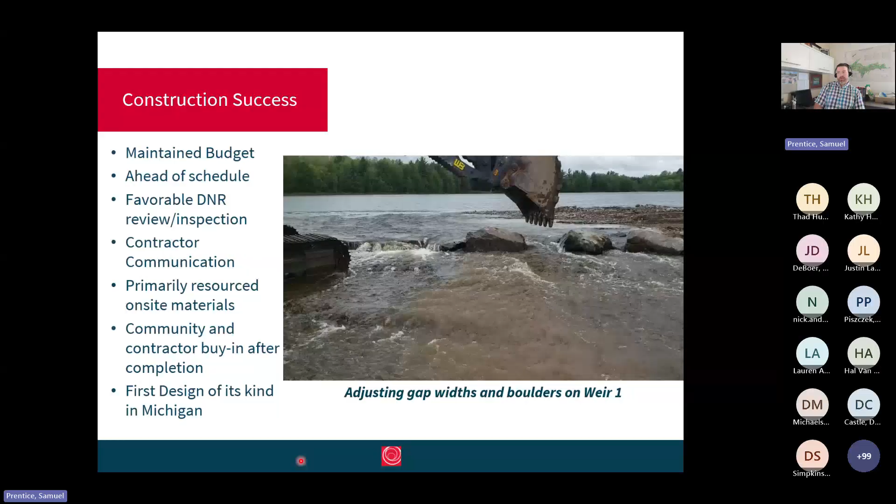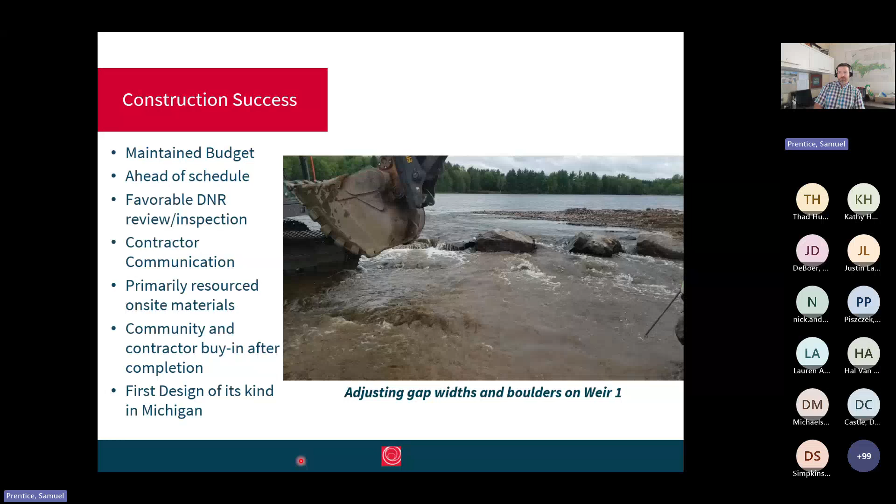Successes: we were able to maintain our client's budget and finished ahead of schedule, working with the local fish biologist. There was favorable review on their end with their inspections. The contractor was great, awesome to work with, and they were able to source most of the material on site. We also had great community buy-in once the project got going.

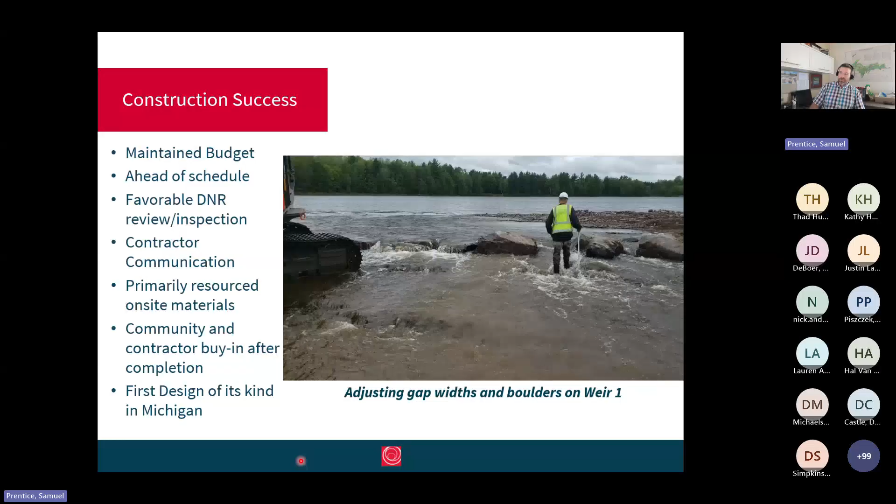There are two other rock rapid structures, rock arch rapids, that have been built in Michigan, but they have a different design. They don't really use the sine wave, and some of the gaps are a little bit different than ours. That's why I talk about this as the first design of its kind in Michigan.

For future monitoring, this is very much in process, but we'd like to install pressure transducers at the upstream and downstream ends of the rapids so we can understand the head loss across the entire structure with high and low flows. We'd like to reinstall a gauge downstream of the rapids where there used to be an old USGS gauge, so we can get measured discharge throughout the year. From there, we would do PIT tagging on fish and install arrays for those pit tags at the lower and upper ends of the rapids.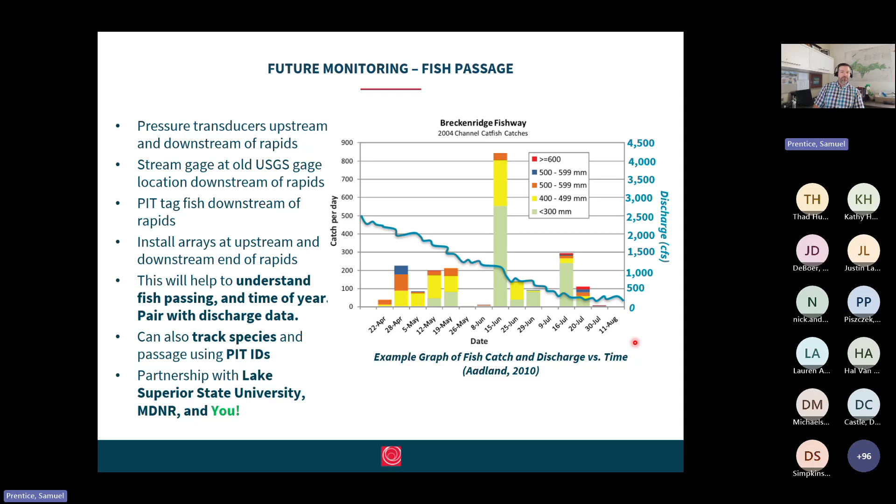We're working with Dr. Ashley Moerke at Lake State, and Jen Johnson with the DNR has also been very involved. But we also want to work with you because we need money. This is all voluntary, and we're trying to go through the grant writing process. If anybody has funding programs they've had success with for monitoring, or ideas on how to build this research study, I'd definitely like to talk with you more, because this is kind of the new thing for me to think about now that construction is complete.

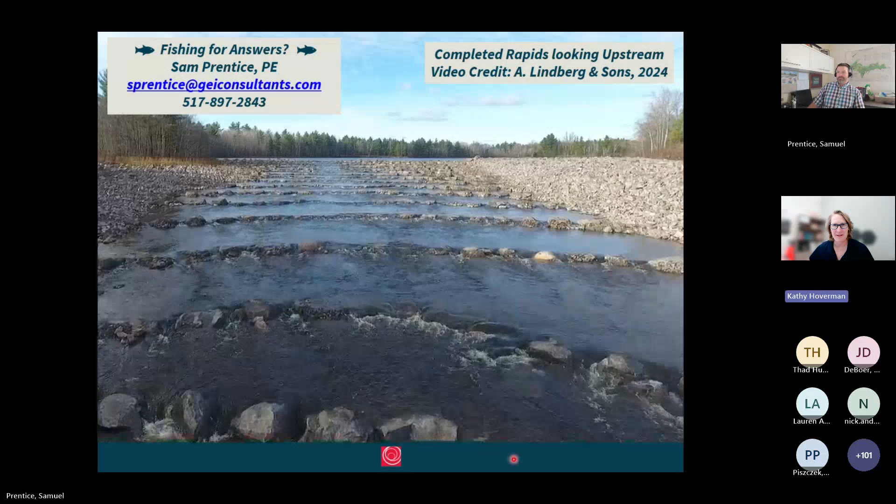Awesome, great Sam, this is very cool. I love that you figured out turning the boulders made a difference. I've designed and built a couple of these, but I don't think I ever twisted the boulders like that. So I love that. Okay, well, let's get into some of these questions.

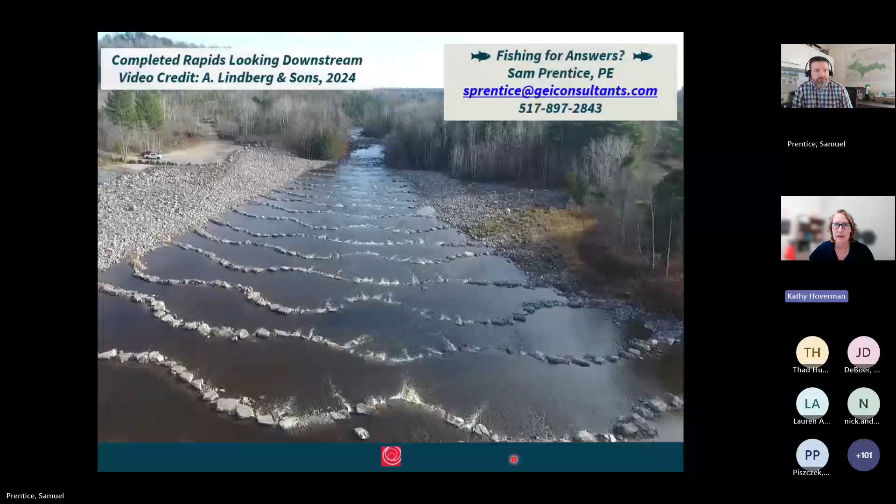There's a couple things that seem to be a theme. First, there's a general question about whether there's a link to the report, and that was an early question, so I assume that's about our design report. In Michigan, all the permit applications are public, and our permit application and design reports are embedded in there. Happy to share that, and that's accessible by anybody with a MyEnviro account. You can get a hold of Sam directly via email if you want a link to that—that's probably the best way.

Okay, a couple questions on the modeling—I'm going to lump both of these together, you can answer them together. What 2D software was used? And can you give more details on how the boulders were modeled in your 2D?

Yeah, so it's 2D HEC-RAS that we used, and then I guess the Civil 3D surface—we modeled with feature lines, top of boulder, bottom of boulder. I actually didn't do the modeling on this, so I said I did everything, but that's not true. As far as model approach, I believe it was just that kind of mesh size I talked about, and also assigning a Manning's roughness value to that. For the person asking the question, get a hold of me and I can put you in touch with the modelers that did this.

All right. So there's a little bit of a question on any reason to use chinking stone rather than rounded river stone, and concerns regarding scraping for fish during passage on sharp edge substrate.

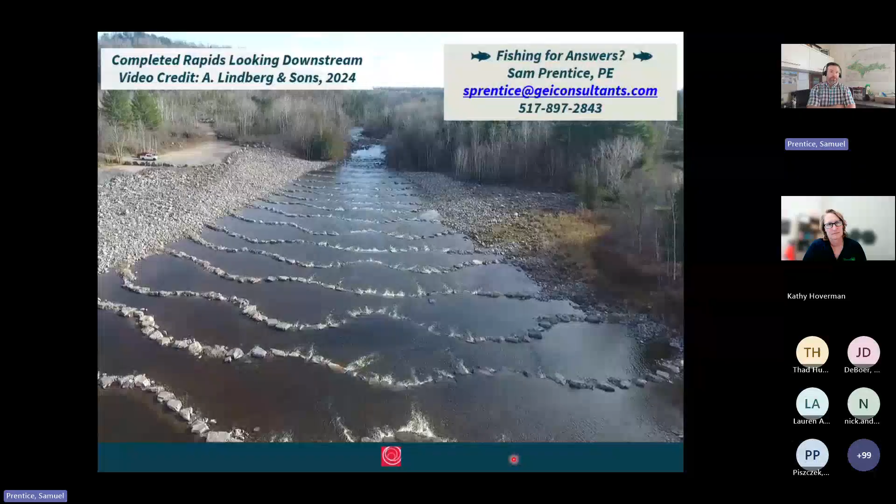Yeah, it's a good one. This is kind of the philosophical debate, right? As engineers, we like angular stuff because it locks in and we can sleep at night, but we are trying to build this into a natural system. So I don't have a fantastic answer on that, especially from the fish scraping side. I have gone in and snorkeled this a bunch since it's been built. I haven't scraped myself, but I do understand the question that there could be a conversation there. Maybe you do some thin veneer of smooth stone where the fish is going to interact. You would have to upsize that because it's not going to lock in. But I do think it's extremely important to have the base not go anywhere. You don't want the foundation of your house going out from under it.

And I will say this person did say chinking stone, right? So not the big point boulders. Yes, yes. But yeah, I think that worked. That still works on the idea.

Okay, were in-stream restrictions waived by the agencies in that September to November range? Oh yeah, like the kind of work windows.

Yeah, they were. So I'm not the biologist, but I guess there would be some fall spawners in here. We did get a special exclusion to start the mussel survey early. In Michigan, you can't usually do the mussel survey until June 1st, but we did go in and snorkel and saw that the mussels were already out and siphoning. I know the question was more related to the fall, but they were able to work fully through the fall, and I think they finished the first week in November.

Great. How flood resilient is the overall structure? Is it expected to change over time but still provide passage? So the crest itself, the upper end of the structure, we had to make sure we were below the 100-year because that's the regulated floodplain. We ran 200-year flows through there also.

And so that intake canal that I was talking about that got filled, that's filled to a foot higher than the 200-year. With some of Luther's projects, he has had them in the ground, well, in the river, for 20, 30 years. We do get the question a lot like, are the boulders going to move? How does the system look different? You may have river sediments moving in and out, but the boulders themselves are not designed to be mobile. So as far as this looking different in 10 years, we are passing high floods, and that is the design intent.

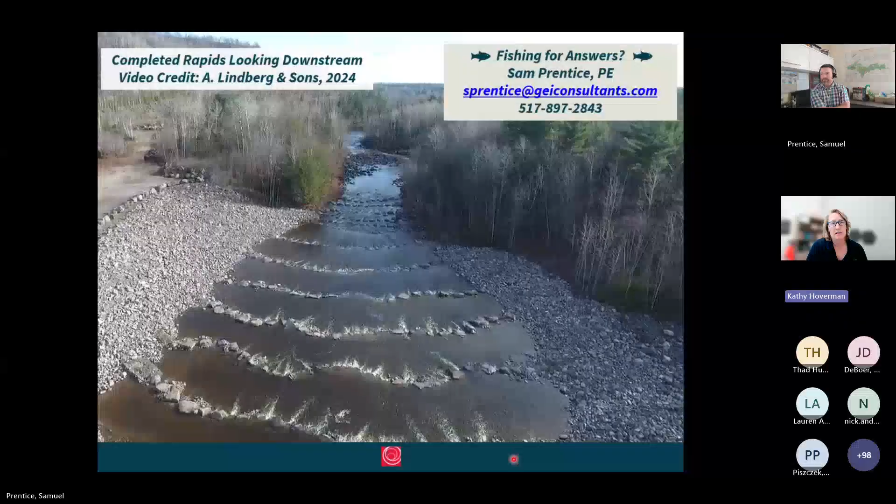All right, I'm going to ask the two next questions back to back, I think you can probably answer both of them together. Have you found the shorter gaps effective to prevent debris accumulation, that essentially looks like a bit of a funnel that could clog or pinch closed at the upstream end? And then the second one is, do you anticipate maintenance issues with logs, trees, brush moving downstream and clogging up the boulder gaps? So questions around those gaps and clogging and how that may happen.

Yeah, and that is definitely one we have gotten a lot. I think the fastest way to answer the second question about debris management in general is it would be no worse than the old dam was.

No worse than anyone thinking about doing this at a dam site. Right now there are logs that have gotten hung up on the crest, but when the water comes up, that's going to float down and might get hung up on the next set of boulders, but it's just going to move naturally the way it would move through a system if we hadn't built it.

I don't have a great answer for the first one, the shorter gap part. That's really interesting. We've also gotten a question about ice, basically that you're going to lock the ice in, and I actually think the gaps help with that because ice is strong in compression but weak in tension.

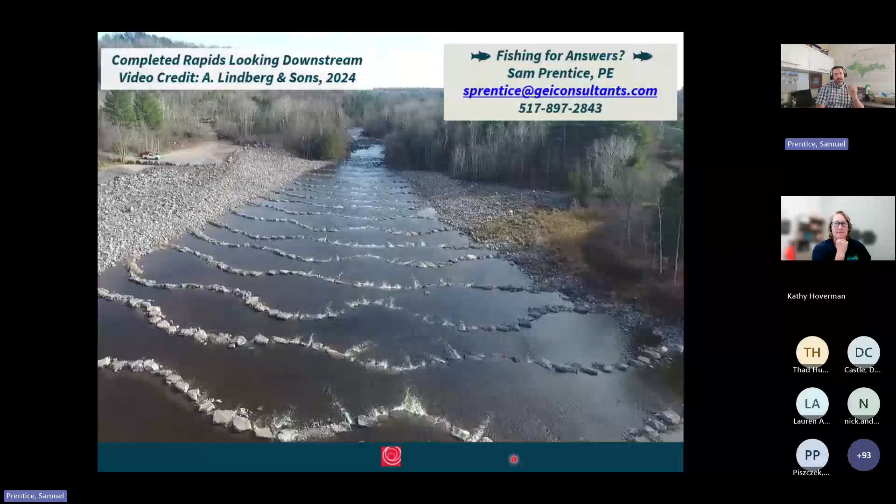Were there any mine sediment tailings concerns or removal with the project? Yeah, good one. So that mine has seepage water that has gone into that old open pit mine. I guess we did not see any issues with reusing the waste rock. It has that larger density with some metal content, but we did not do any additional testing on it, nor were we asked to. So far there don't seem to be any issues there.

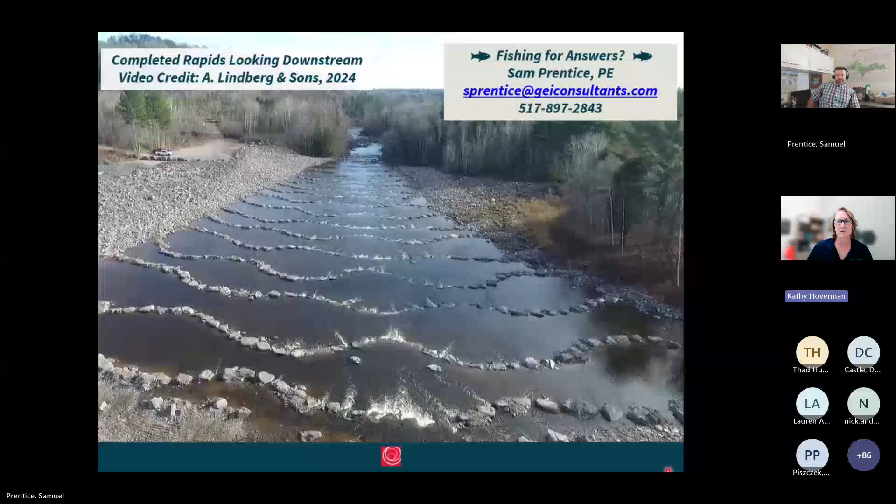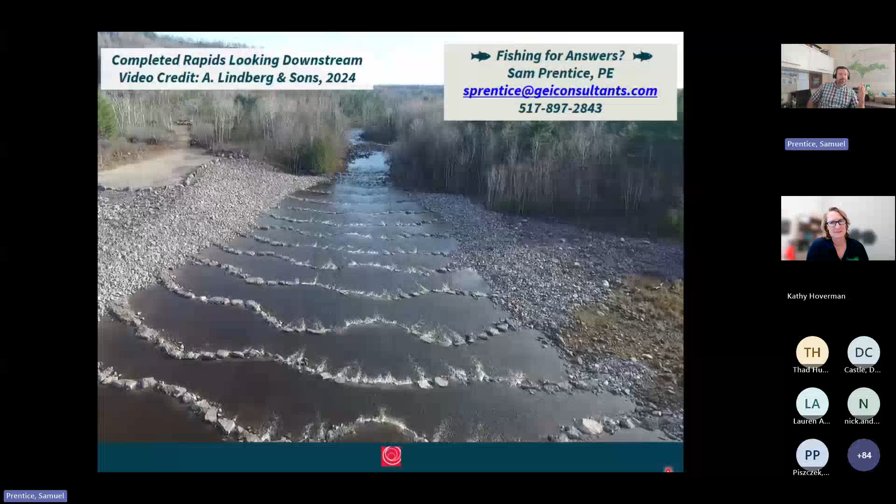Sounds great, so here's the last one: does this design improve habitat for mussel species or other non-fish species? Excellent question - so we don't know. I think with that last slide on future research, that is absolutely a question we would like to answer. So yeah, it's possible.

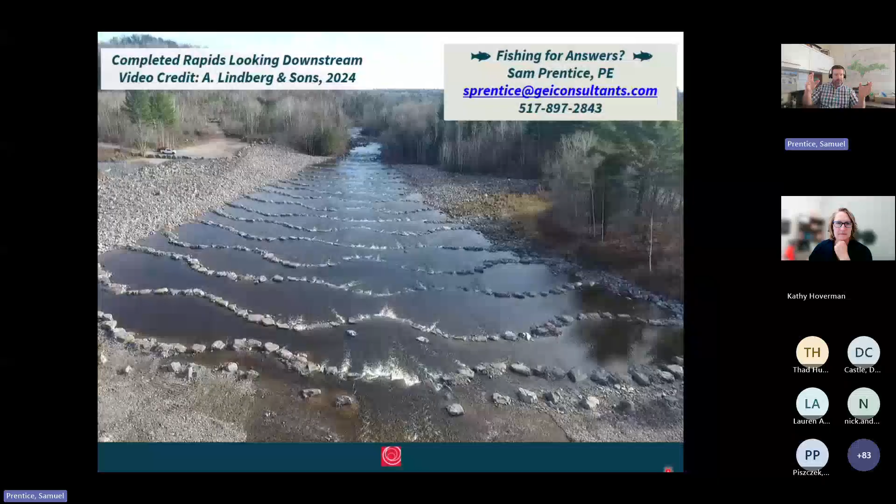I do think for fish, a lot of fish are hanging out in here for habitat. This is not just a highway, this is not just for passage - there are a lot of reasons fish would want to hang in the rapids. That's why with the PIT arrays, we're trying to do that at the upstream and downstream end. If you have an array at the downstream end, they're hanging out in there for three weeks - they might just be loving it, but we don't actually know if it's a passage issue or if they're just using the rapids for habitat.